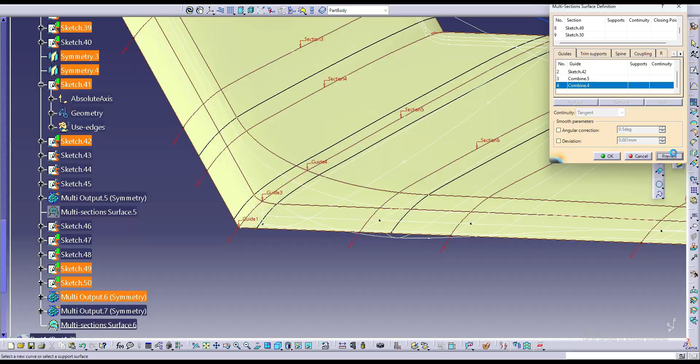In this video, I'm going to show you how I design a realistic, fully 3D printable B2 stealth bomber. Every part is designed to be functional and ready for future upgrades.

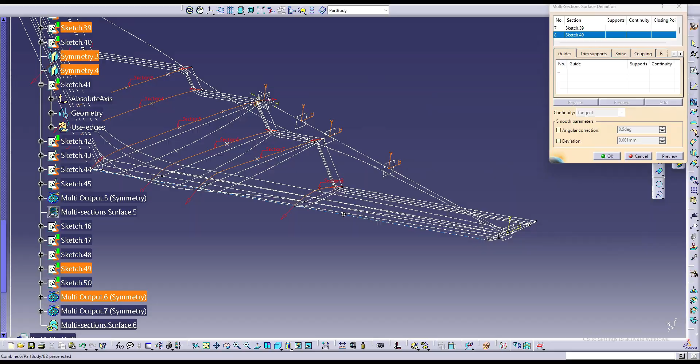When I started designing this model, I kept three key things in my mind. Every single component had to be fully 3D printable. The entire design needed to be upgradable for the RC in the future build, and every part had to be fully functional, not just there for looks.

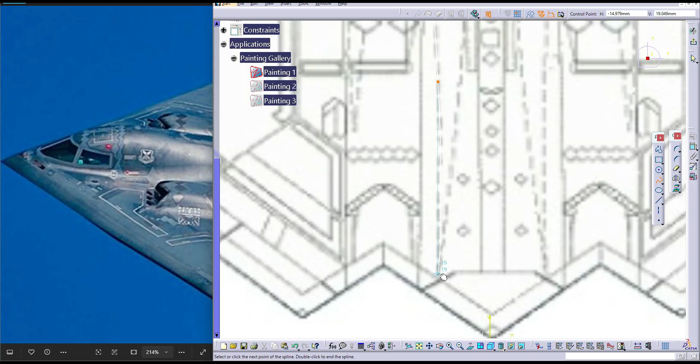With those rules in place, I start with the basic wireframe. Once the wireframe is defined, I generated the main wing surfaces, and that's when the aircraft really starts to take shape. After that, I start making the blended cockpit design, not as a separate piece, but as a part of the airframe itself, where structure, aerodynamics, and functions merge into one.

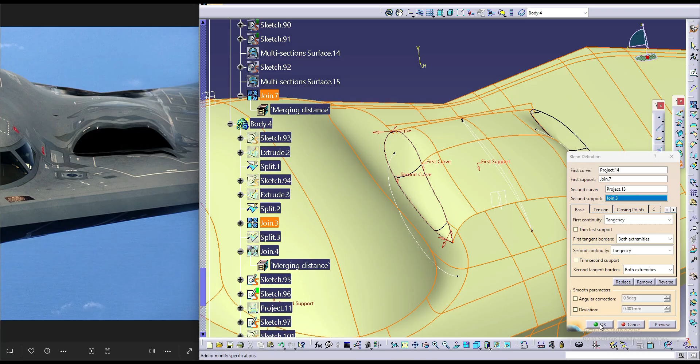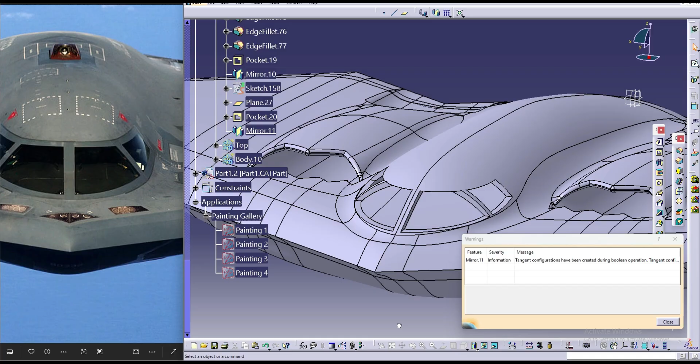After the cockpit, I move on to the blended engine cowl. Again, it's not a separate shell, it's designed as a part of the airframe. Once the main features are designed, I move on to detailing the aircraft. I define the shell thickness, fine tune the engine bay, and design the cockpit windshield. After that, I designed the engine bay and the landing gear pockets.

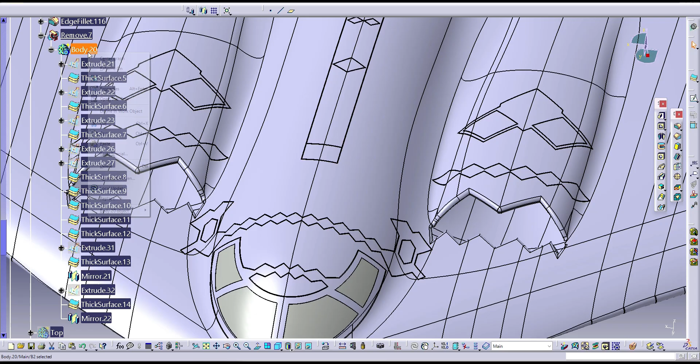For the panel impressions, I use a subtractive surface offset technique. I remove a 0.2 mm layer from the outer skin. This creates recessed panel lines that read as a realistic surface detail.

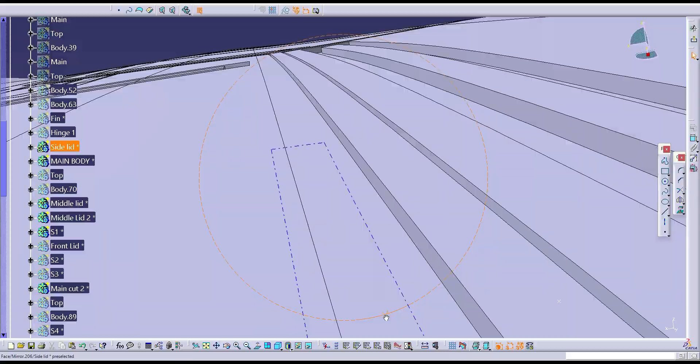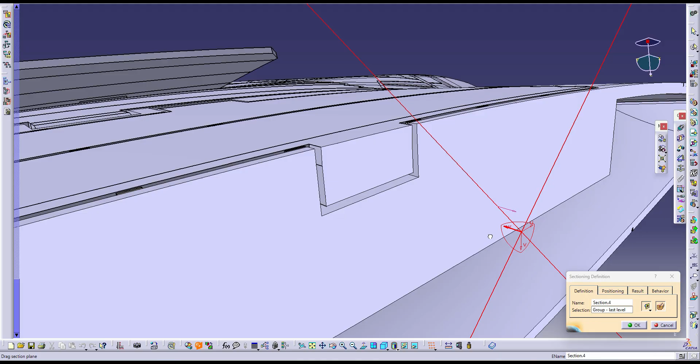After all the detailing work, it's time to focus on the landing gear and the bomb bay door. For this part, I used an integrated hinge design approach. The fuselage, landing gear doors, and hinge geometry are modeled as a single part. This allows the entire assembly to be printed in one piece, eliminating separate door components and post alignment issues. The door remains mechanically functional while maintaining precise hinge clearances and structural continuity.

Between the doors and the body, I add a thin support strip. This strip holds the door in place during 3D printing. After printing, it can be removed, freeing the doors while keeping the hinge intact. It's a simple feature, but it makes the one-piece functional design possible.

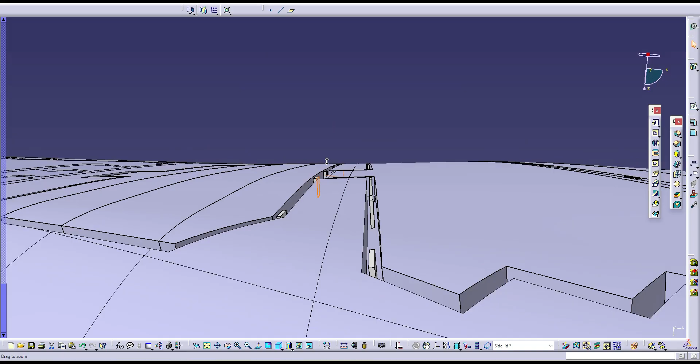After that, I designed the front landing gear as a set of individual functional parts. Each component is modeled to move as intended, and everything is joined together using pins. This allows the landing gear to articulate properly while staying fully 3D printable and easy to assemble.

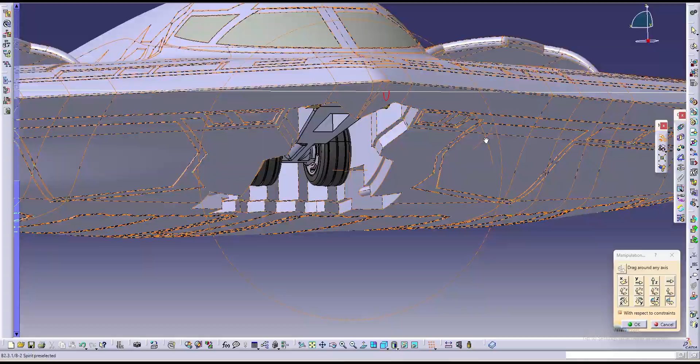For the rear landing gear, I use the same integrated hinge mechanism. The entire landing gear assembly attaches directly to the aircraft body using a snap fit design. This keeps the assembly secure while still allowing it to be removed or serviced later.

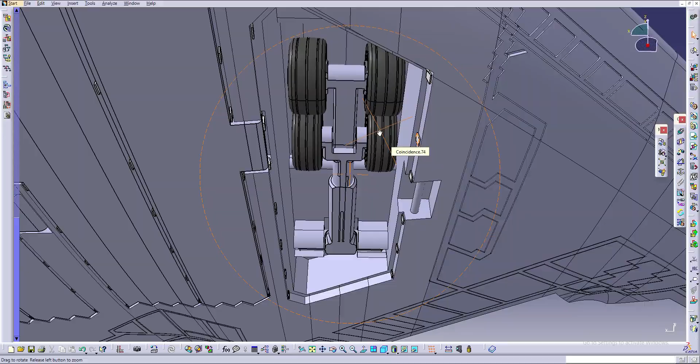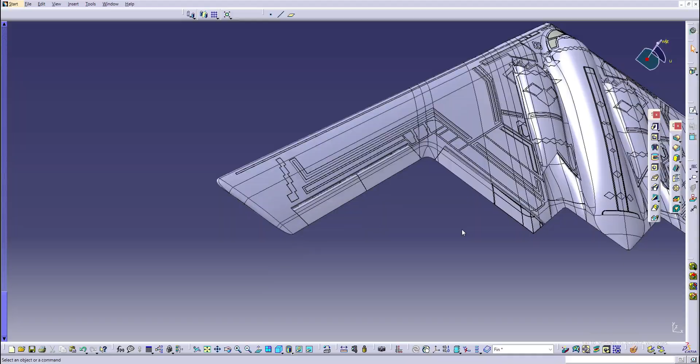For the flaps, I design a functional hinge that directly connects them to the aircraft body. This allows the flap to move as intended while keeping the mechanism fully 3D printable and integrated into the structure. The flaps are printed together with the body as an integrated part. This allows both the flaps and the aircraft frame to be printed without any supports. After printing, the flaps can be released, leaving a fully functional hinge already in place.

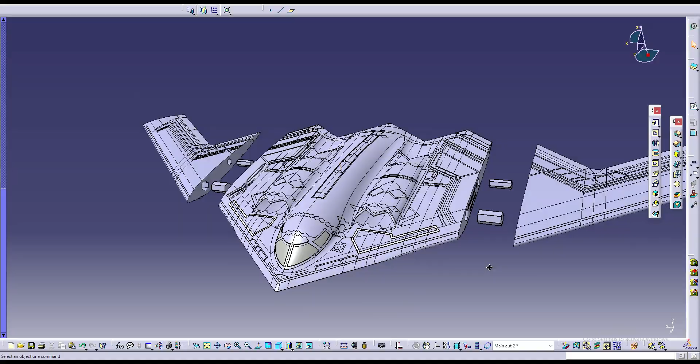Finally, the entire aircraft is ready. For 3D printing, I split the airframe into three main sections. These parts are joined together using hexagonal rods, which ensure proper alignment, strength, and easy assembly.

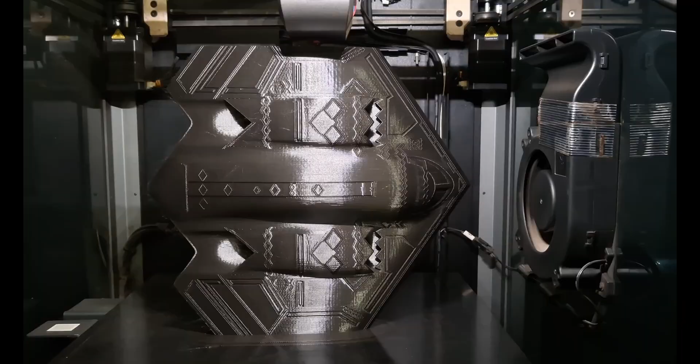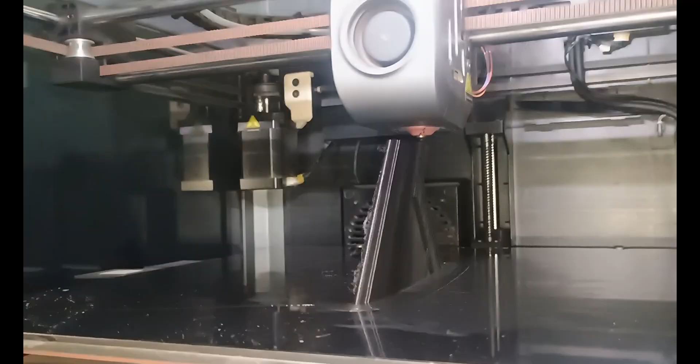After all the design work is finally complete, it's time for the real test. The parts are sliced, the settings are locked in, and the printer starts its work. Layer by layer, the design moves from a digital model to something real you can hold. This is the moment where every decision matters and the aircraft finally comes to life.

With the parts printed, I finally move on to assembly. I begin by bringing the main fuselage together with the side wings, joining them using hexagonal rods. These rods guide the alignment, lock the structure in place, and transfer loads across the airframe. But before that, I remove the flaps from the side wings using a plier. I carefully break them free from the body.

With the flaps released, I join the side wings to the main fuselage. The hexagonal rods fit tight, almost press fit. It takes a bit of force, but the tight fit is intentional. It's what ensures a strong rigid joint at the heart of the airframe.

Now it's time to free the moving parts. I remove the support strips between the doors and the body. Using a cutter, I carefully slice through the support material. Once the strips are removed, the hinges are released and the doors become fully functional. The integrated hinge prints cleanly and functions exactly as intended. Straight off the printer, it provides smooth, reliable movement without any additional hardware.

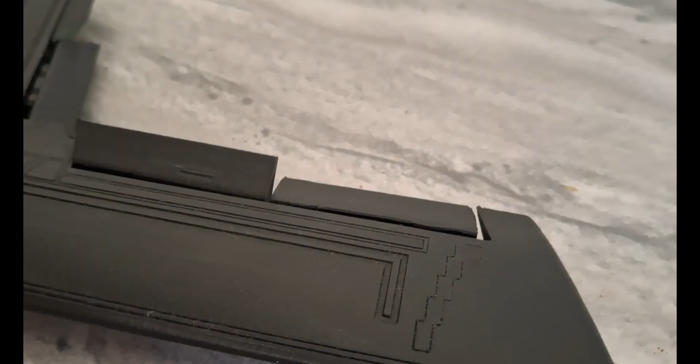Now I attach the flaps to the airframe. The hinge connects the flap directly to the structure, allowing them to move freely. This joint ensures smooth motion and keeps the flaps fully functional as a part of the airframe. Now it's time to print the front and rear landing gear parts. These components are printed separately, ready to be assembled and tested for proper function.

I mount the tires onto the wheels and begin assembling the front landing gear. Each part is joined together using 3D printed pins, forming a fully functional assembly ready to support the aircraft. The wheels are attached to the landing gear using wheel pins. These pins lock the wheels in place while still allowing them to rotate freely.

The rear landing gear is designed as an integrated assembly. During deployment, it rotates by 90 degrees, allowing the gear to engage smoothly and lock into position. At last, I attach the front lid to the front landing gear using glue, but I make a small mistake. I accidentally glued it facing the wrong side.